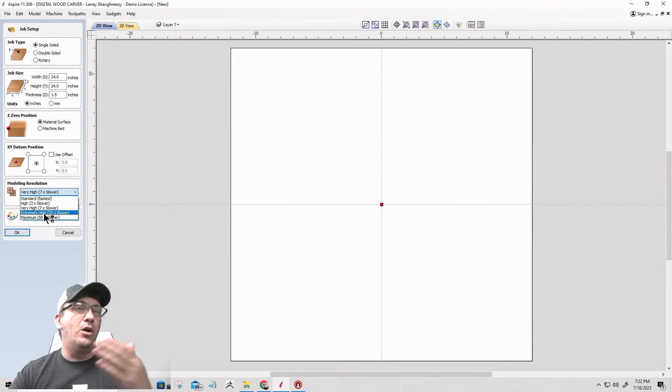So I'm going to hold down the Shift key before I click on create a new file. What that will do is activate the additional model resolution features here that aren't normally shown. And if I didn't do that at the beginning, I could always go back and do that after. What I mean is, let's say I had set up a standard resolution and wanted to go back and adjust it before I start modeling, not right in the middle of it, but I could come back to this icon here, which is the set job dimensions and origin. I could hold the Shift key down and open it up from here, and I would get those features as well.

All right, so we can access that. I like to do it right from the get-go to make sure that we get things going. All right, so for tonight's class, this model is going to be of size.

It doesn't matter where your XY origin, your datum position is and everything with this project, but this is what my particular setup here is for tonight.

And our model resolution, I'm going to set that to extremely high. I do not need to go to the maximum resolution here. What I do need is to be above the high resolution, at least extremely high. I don't necessarily need to be at maximum.

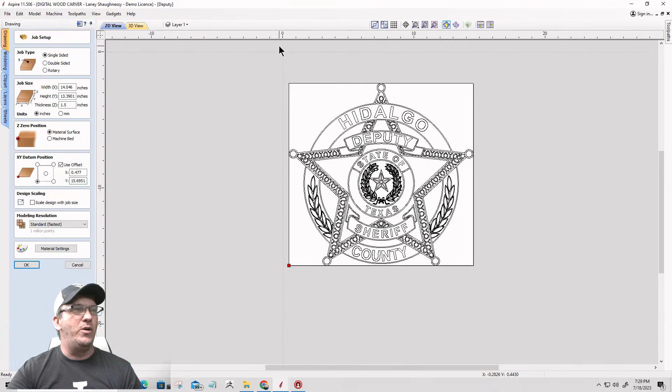It's going to either crash my machine or be way off the material and screw up this nice piece of wood, because my datum, my start point, is here, but I've zeroed out on the bottom of my board. So it's going to continue downward 15 inches from there, and over 0.477 inches because of that offset. I'm going to be like, whoa, what happened? Oh my God, what's going on?

I'll come back and try to figure it out, not paying attention to my job setup. I'm just going to sit there wondering what in the world is going on, why everything is so crazy. Then finally I'll figure it out, find that offset, uncheck it, and recalculate all the tool paths, and everything is fine. By that time I've either crashed my machine, screwed up a nice piece of wood, or I might have been smart and hit the E-stop before any of that happened.

So that's what we don't want to do. What we want to do is set up a job properly. In this case, I've got a job set up that's 24 inches by 24 inches by 1.5 inches thick. I'm starting at 0 for the XY datum in the center of my material, and touching off on the material surface. I hit OK to set that job setup, and then I'm going to import the vector of this design into my project.

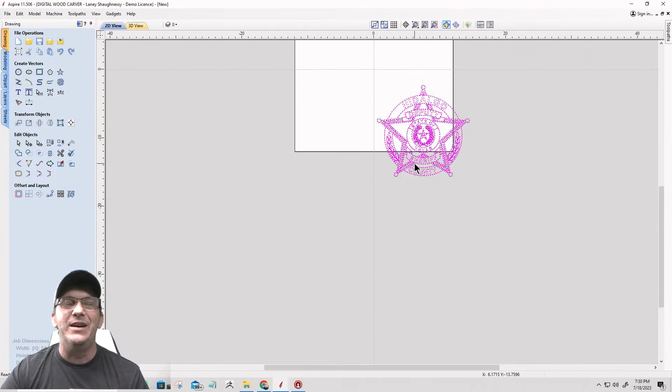So when I come in here and import that DXF file, it's going to import down here, right off the board. That's why it's never going to land perfectly in the middle - that's where the creator created that file. It's going to be up to me to align it to the center of my material and go from there.

That way we don't create these offsets and ungodly screw-ups. We don't bring those problems in. So keep that in mind.

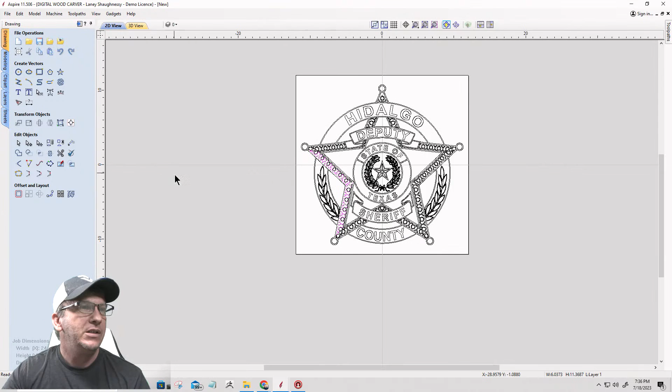So for the text, I'm going to get rid of it.

And let's put some text in there. Okay, I'm going to add some text. I'm just going to add the word county or something, so it's kind of a generic design and not specific as far as that goes.

And what I want to do here is go into node editing mode. I'm going to cut the vector down here on this corner of this arch, and I'm going to cut it over here as well.

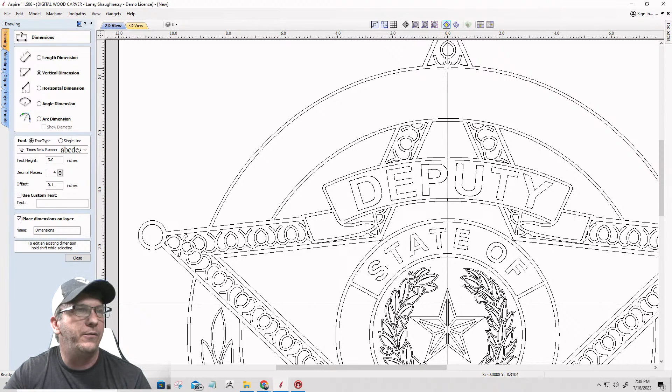And on that vector, I'm going to take a measurement - a vertical measurement straight up and down from the top arc to the bottom arc. And that measurement is 1.78 inches.

We'll call it 1.78. So I'm going to take my arch here and offset it - 1.78 divided by 2 equals - and I went the wrong direction, I'm going to go inward because of that.

And I'm creating a center line, a center arc. Now when I come in and add my text...

I'm just going to go with 'county.' The text that I'm going to use tonight is going to be Arial bold, just a straight up Arial bold. And I'm going to select that text.

Let's move it over here so everybody can see it. I'm going to move that there and this here. And I'm going to come over to the text on a curve tool.

And I want to be on the curve. I want to scale to fit the curve - not that big, right? We're going to reduce the scaling down quite a bit.

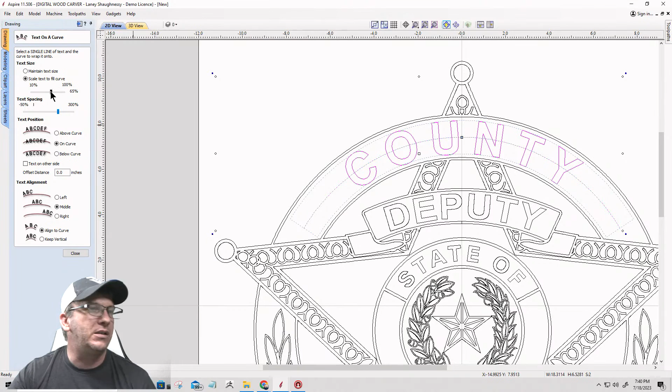All right, so that's going to be my county there. I could put any kind of text or anything there, but I'll just put the word county.

And then what I need to do is I just created an open vector by cutting it from the other vector there, so I want to go back into the join tool. Those two vectors that I have selected here on the screen, I want to join them back to one closed vector. Okay, so that little lesson was how to curve your text to follow a curve if you ever have to do that.

All right, now let's go in and look at what we have here. So on our star, if you remember, we have our circle and the stars sitting on top of it.

So number one, we need to create a foundation. We're going to be modeling, so we need our vector for our foundation, and that's going to create the base of what we're going to be building up upon, okay?

And then, give me just a second before I go to number 2. Kurt, how much of the design can be done with VCarve Pro?

All of the vector work and the V-carve setup, anything but modeling - everything I'm doing now can be done with V-carve Pro. But when it comes to building the three-dimensional model, we will not be able to do that with V-carve Pro.

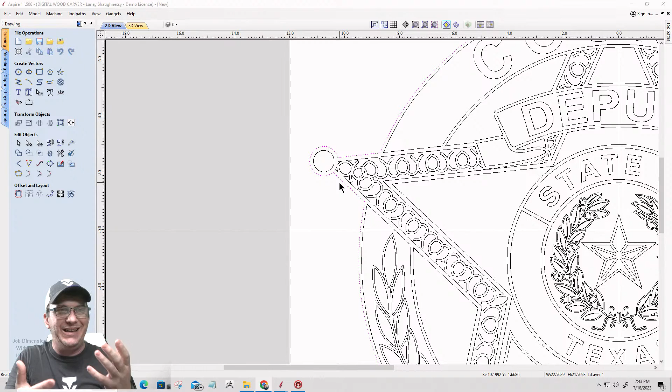Right out of the gate, you're not going to know if you have all of the vectors that you need. As you're stumbling along building all of the parts, you're going to come across situations like, oh, I have to build this shape up, but it's not building like I want it to, because either the vector is created incorrectly, or it needs to be redrawn, or it needs to be created because it doesn't exist. The vector that you need doesn't exist, and we have a couple of those.

So I'm going to show you all of that stuff as we go through and model and everything. Okay, let's get into that here.

First things first is this badge. In reality, the lower part of the star here is sitting on top of this outer ring, and then the upper part goes under that ring to here, right? So the ring covers the top of that, just like you see in the vector. We have to build the model so it fades and does the same thing. We got to build our shape for here, and we got to build our shape for here, but nothing is connected that we need.

These things, again, when you're just first starting modeling, you're not going to notice them. You're not going to be able to open the file and go, oh, that's what I'm missing. You're going to start creating the shape based on what you've learned, and you're going to be like, oh, I don't have that vector. What do I do? And you're going to have to go back and create it. I'm just giving you some advanced view of the things that we're going to need right up front to clean up the vectors, and then we're going to build our model after that.

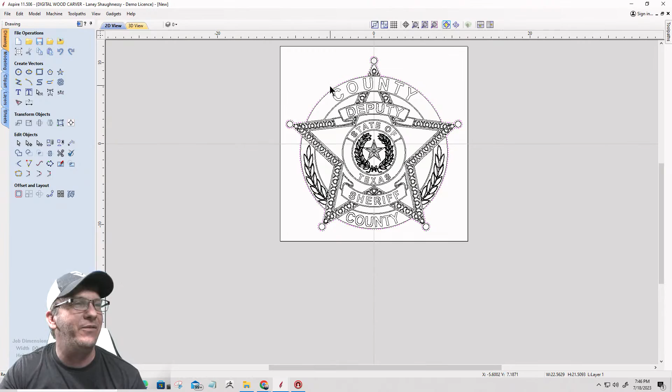So for the foundation, it's always 99.9% of the time, in my opinion, going to be the very most outside vector. The outside boundary is going to be our foundation vector. I'm going to split my view here so you can see it, and we're going to go into the modeling tab and create a shape.

Now I want this badge to have a slight curvature to it. I don't want it to be a big dome or anything, just a small curve, just a small bend to it. For me, 15% or 15 degrees of dome or curve is a good subtle curve.

So you're going to see when I'm creating the curves and things, I'm going to be working between 10 degrees and 15 degrees. In some cases, depending on their need or requirement, I might jump up to 22.5 degrees. But for the most part tonight we're going to stick with about 10 to 15 degrees, just a nice subtleness to it.

So let's create a curved profile, this one up here. The curved profile, we're going to go 15 degrees. And on a base height, I'll show you when the model gets built, but you have your profile height, your shape height is what it's called, and that's from where the model curve starts and where it ends. Then underneath that you're going to have straight meat, the thickness and everything - that's base meat. Anything under our curved profile is base meat. So for our base meat here, I'm going to go 1/4 inch.

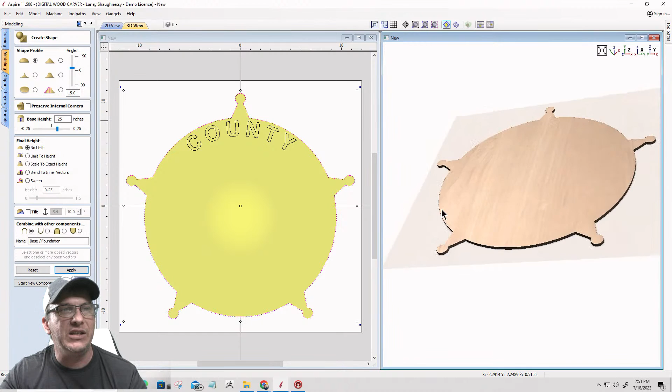All right, so if I turn this to the side and zoom in, this curved profile from the top edge of the material all the way over to the dome to the other side - that's our 15-degree shape height. And then all of the straight meat from the top here down, that is the base height. So the base, in this case, is 1/4 inch thick. And then on top of the base, the shape gets built - again, it's just a very subtle 15-degree curve. That's our foundation.

Okay, now let's close that out. I'm going to turn off the foundation here for a minute so we get back to a clean screen. I just made it invisible - it's still there, I'm just turning it off for right now for visual purposes. All right, we're going to maximize the screen back up to here, and we're going to continue on.

Now for this, the next step would be the actual star, the actual star here and everything that sits on top of this ring. So we're going to have a ring - these parts right here, so there's 4 quadrants: 1, 2, 3, 5 actually, 4, and 5. Those are going to get cut through, they're going to get cut out and cut through. They're hollow, you know, and everything.

And so the star sits on top of this ring, except for where it goes under the ring. What I don't have, if you look closely, is my star vector. I have a vector that's cut off right here and then comes around, but it doesn't actually connect to make the star. I don't have the star, so how am I expected to build that shape up if I don't have the vector for it?

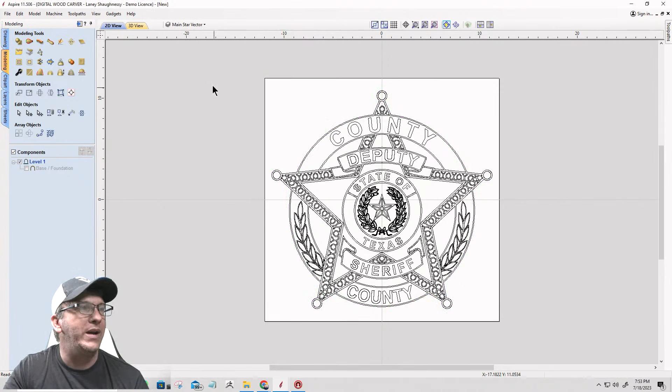We're going to take our entire design and copy it to that layer, putting a copy of it there. We're going to come back in, wait for it, get that white screen of death, so I'm going to type in save here in just a second. Let that catch up to itself.

Let me go up here and save this design because it's a big file with lots of vectors to deal with. So let's go to save as, and in tonight's class we'll call this our class 1 3D model, class 1 part 1, and hit save.

Now what you will see, once that saves, is our level layer 1, that's our default layer that always gets created when you start a new job, and we have a new layer we just created called main star vector. There's also a layer 0, which is the layer name of the vector file we actually imported. So the original star was imported into that layer 0.

So if I turn off our main star, the copy we just made, and turn off the original layer 0, that's the outline I put in there, and layer 1 is the rest of the design. So we're going to turn off layer 1 and layer 0, and turn on our main star vector, and I'm going to give it a different color, red, so hopefully y'all can see that.

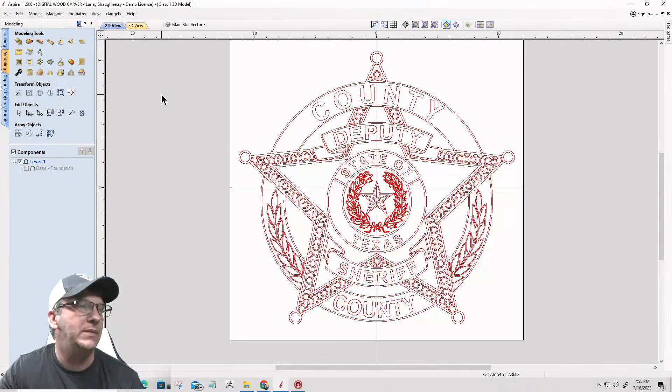So I want to make sure I can read the layer here, and make sure it's bold when I'm looking at it in this box. The letters are bold, that means it's active, okay? And what I'm going to do now is a little bit of node editing. We're going to go into here.

What I've got to do is connect from here to over here on my star. I don't necessarily need this line, it's a straight line, so I can skip the one in the middle that's selected right now. So I'm going to come over here, right on this corner, get to that corner, and cut the vector there, cut that line.

And over here on this outside corner, zoom in, get yourself zoomed in, get right on that last node, and cut the vector there. I'm going to follow this vector around, I don't care which way you go, one way or the other, it doesn't matter what direction, just know where you're going. I'm going to follow this vector around to here, to this side.

Zoom in, get yourself zoomed in, and cut that vector. Now that's also going to be a straight line that connects to here. Think of this being the inside corner of the star, the sides of it, like the thin waist of the star, if you will. So that's what we're connecting to.

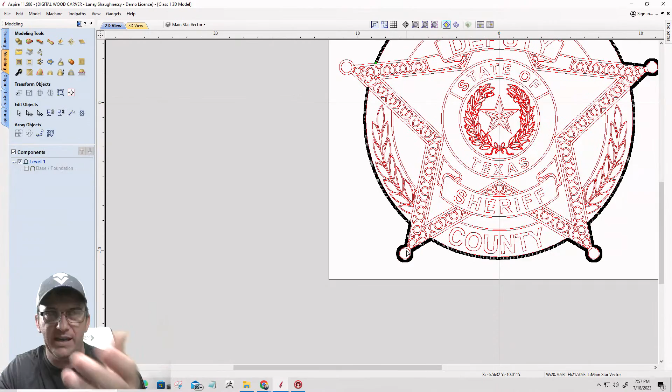We're going to do all the points the same way. If everything else was a distraction to you and you just want to focus on the star, you can go in and delete some of the other stuff. But I say just focus on what you're working on. After we do all our cuts, then we'll delete it out of there.

So the only thing we're left with is the star. But if you're getting lost with everything, we're not dealing with any of these little flourishes at the moment, we could get rid of them. We're not dealing with the word sheriff, the county, or the circles in the center, we could get rid of them. We could delete things if they're in our way. I'm not saying do it, but as long as you don't delete the vectors you're actually trying to connect and work with, you're fine.

Coming down here to our next point, get zoomed in. Make sure you are on that corner point, okay? Roll it in, zoom it in. I have a mouse with a roller wheel on it. Put your mouse wherever your point is, where you're rolling into that point, it's going to zoom in to wherever your mouse point is.

So I'm going to cut that vector there. I'm going to follow that, okay? So this line here is going to connect to this line right up here. So we're going to zoom into this corner, get in there, and cut that vector.

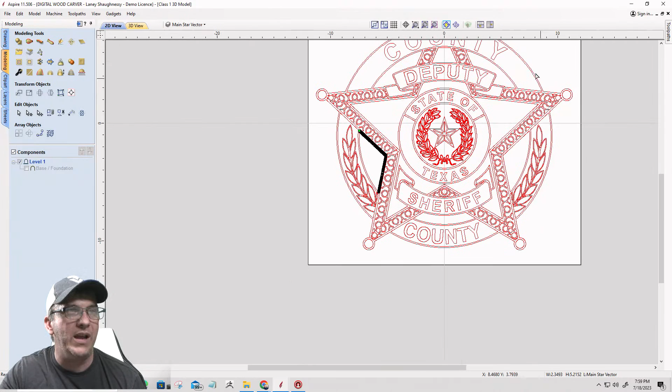Now once I get around to the points, I'll show you what we actually cut and we'll get rid of what we don't have. But let's go follow that vector around to this side, this point. And this is where we cut the vector, don't delete. This is where the time consuming stuff comes in.

Here, the star goes up, it connects to that line, and then it comes around and connects down here. So that's going to be the star. It's got this little curve to it. We're not going up past this banner. We do not go up past the banner. We're creating the outer profile here, so we're going around the banner. That's this curve right here.

So on here and all, I'll end up showing you as we get into it. We're going to come off just probably about the middle here. We're going to make a new curve, and it's going to be required for this, but you'll see. I don't want to get too ahead. I don't want to confuse you.

All right, let's go over here and cut the vector. Zoom, zoom, zoom, zoom. Get into that corner and cut the vector. Up here at this top corner, get into that corner. Cut it. Actually, undo that, Control Z. I don't need to cut that one. It's got to go over to here, and I've got to cut it on this side.

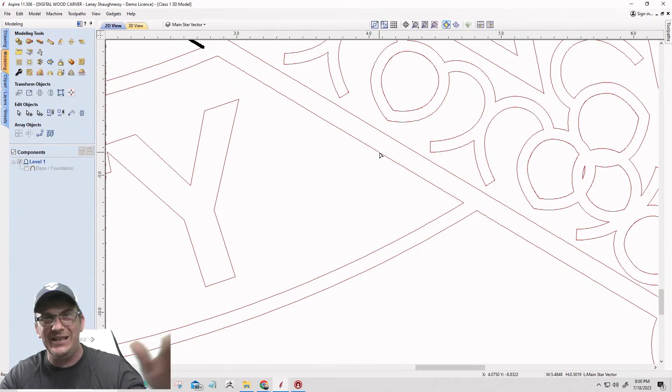Don't cut it up at the top. Don't need to cut it at the top. Control Z is undo, I undid that cut. Cut that vector there, and that leads into this point. Again, I'm not worried about this line, it's a straight line, so I can connect a straight line from point A to point B. I don't need these middle points. That's why I'm jumping past this line, and I'm cutting it on the corners of the points.

Cut the vector there, and so we're coming around now. We're coming around, let's come in here. Get zoomed in. Cut that vector. Now this one comes up and connects up here, right on that green one. Cut that vector.

And around to this point, get in on those corners. You're going to hear me say that over and over again until we get through all 5 points. And then this is going to connect over to here. Get in there, cut that vector. All right, so we have got one more point to go. We're getting there, we're getting there.

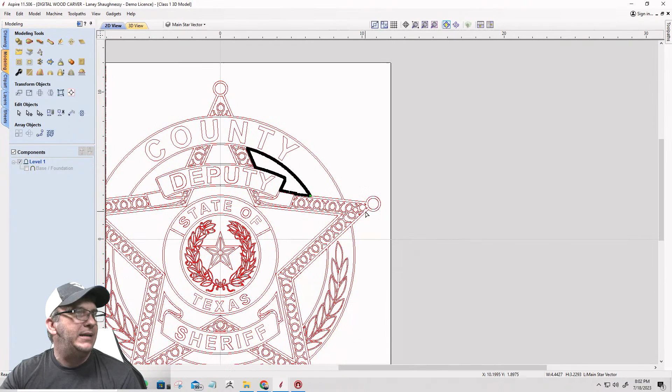Come around to this one. We're almost there. Cut the vector. That's going to connect over to here. Cut the vector. And that is going to come up and around, come up and around to here. Zoom in and cut the vector.

All right, now this one is kind of all by itself. It doesn't connect to anything except for kind of itself, right? So we're going to still cut that free. Zoom in, right click and cut the vector. Stick with me, we're almost there. Come over to this side, get in that corner and cut the vector.

All right, now we're going to delete. Let's go through and get rid of things. So this line right here, it's not the star, gone. This inner vector right here, it's not the star, gone. The word county, gone. This vector here, gone. All of our outer stuff, we can work our way out, and then the inner stuff here, you can cut and get rid of. Gone.

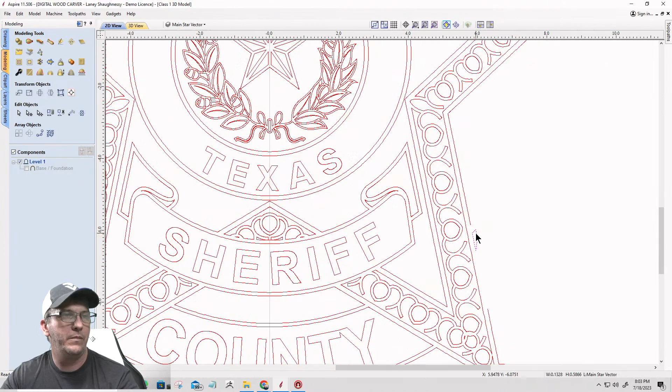Leaving our inside lines for our inside hips, right? You know what I mean? And they connect to the corners and stuff. Down here, outside line, we just cut it loose, gone. This ribbon here, get rid of that. The word county there. Over here, outside vector gone. Get rid of these leaves.

And remember now, this is not your original, this is a copy. Do not do this to your original, because then you have nothing to work with for the rest of the model, right?

All right, so now this vector right here is cut free, right? And over here, this one on this corner needs to be cut. Zoom, zoom, zoom, zoom, zoom. Get in there as tight as you can. Cut that vector, and that arch goes away.

Delete that. All right, now let's get rid of everything that's not our lines. So in the middle here, I'm going to select all this middle stuff and hit delete. Be cautious of what you're deleting, make sure it's not your outside lines. Now the outside lines are our stars. I'm going to keep this for a minute, you'll see how I'm going to use that in a second. But we're going to get rid of all of this miscellaneous junk.

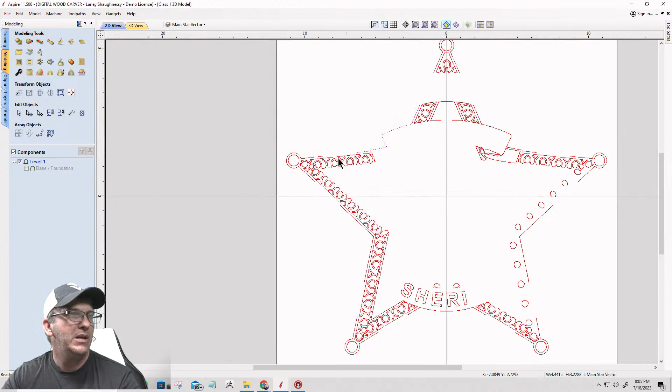Go through and delete this stuff, all these little bubbles and things. And the only thing that I don't want to delete again are my lines, right? So anything inside of those lines, I can get rid of. Delete. Delete.

So now I can go through and start being selective. Make sure I turn off what I don't want to delete so I can be a little bit faster about it. Hold that shift key, turn off what I don't want to delete, and everything. And as long as what I'm trying to select is not 100% in my selection window when I draw it from left to right, then it's not going to select it.

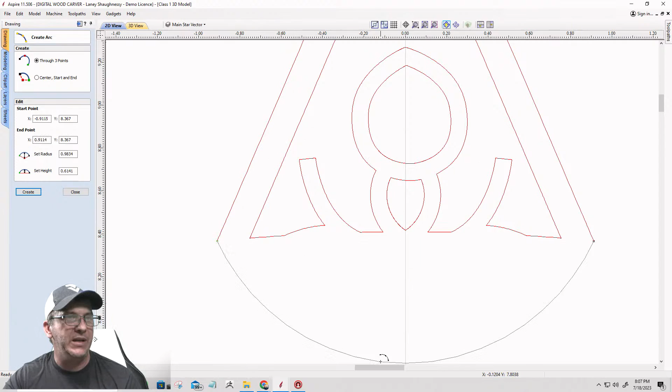Okay, now the reason why I'm keeping these things up here is because this part has to be closed off. The vector has to be closed off, but there's a slight arch here. So we're going to use the arc tool, draw arc tool. We're going to click here. Let me zoom in, let me get really up close and personal with that so you all can see it. We're going to click here for the left side of our arc, we're going to click here for the right side of our arc, and our pull up here we're going to follow that curve, right? Once we do that, we're going to take and join that together as one closed shape.

And then the stuff in the middle, I do not need. Okay, so that's that point there. Over here, this left side and this right side has to connect together, because remember now, this is hidden by, it goes under that ring, right? So we have to close off the vectors accordingly. We have the top part, this is all hidden by that ring, and we have this bottom part here.

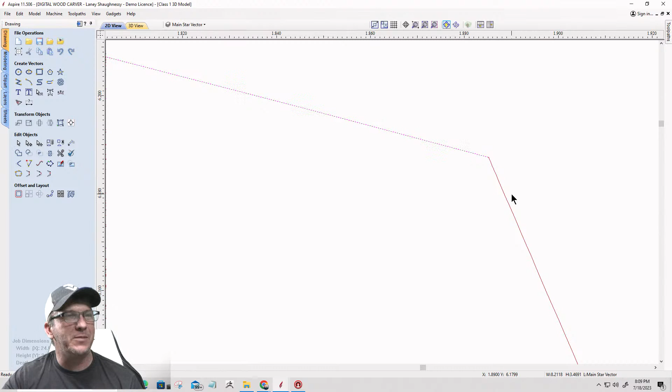So right here, I missed my point. So I'm going to go into node editing, and I'm going to bring it up to the end there. I missed it. That's why it was 2 instead of 3. I missed it again, Lord have mercy. Let me do that again. Node editing, drag that node. Get it, zoom right in there. Perfect. All right, I missed my end, that's why it did not connect together. So let's go and join those 2 as 1. They should be 1. And then I can get rid of

Let's hit delete on that.

All right, so now I'm left with this basically a rough outline of a skeleton of a star. What I need to do now is start connecting the dots, point A to point B. Now we can't just select everything and go connect.

We have to select one vector, select a second, and join it. Go to the next one and join it. Go to the next one and join it. You got to work your way around.

So I'm going to just go right to left, doesn't matter. I'm going to select this vector first, hold the shift key down, select this vector, and join with a straight line for that connection. Now I'll hold the shift key down and click on this vector and join with a straight line for that connection. Come down, hold down that shift key, select this vector, and join with a straight line. Come around, hold down that shift key, select this vector, and join with a straight line.

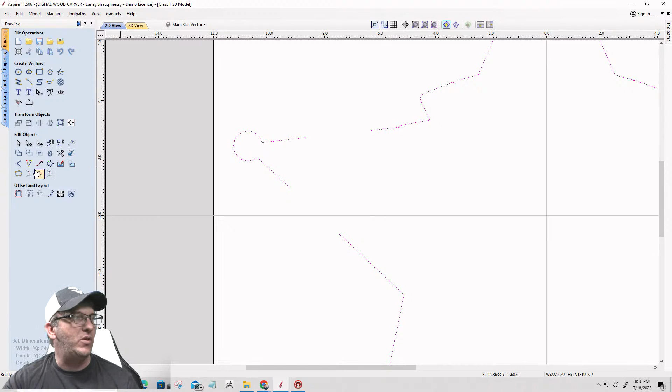And work your way around, join with a straight line, join with a straight line. And on this one, when I have this selected, it finishes, starts and finishes, so I can just click join with a straight line twice. Once, twice. Now I have the vectors that I need to build the star.

Okay, I have the vectors I need to build the star. So that is my star vectors, and now we have that. If I came in and turned on level 1, you would see that we have the red line on top of the black here, but you can see we now have a vector to build upon. Okay, cool beans, all right, so that takes care of that.

Now let's take a pause for a second and hit save to save our work up to this point. And let that save. And while that saves, let me answer a couple of questions here.

Michael Meslick says, greetings Laney and everyone, all good info, no really easy way around this, stay focused and be successful. That's exactly right, take your time, one thing at a time, and don't get too overwhelmed, just attack it however is best for you. Keith Kessler says, hey Michael, how you going? And Michael's okay, and I'm late. Keith, what are you doing being late, man? How you doing, Keith Kessler? It's good to see you. All right, cool beans.

So the next step is we can start looking at things that are insignificant in our build and stuff. And so sometimes, not everything, not all the time, but sometimes little things that don't belong, that's trash, that's oversight or something, they're going to be insignificant in this full overall model build.

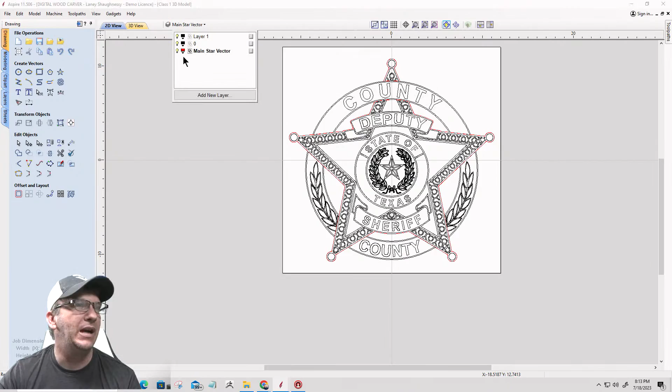That was a mirror image, one to the other, so the trash is over here as well, right? And so as far as cleanup of miscellaneous trash and stuff, really that's all there is to it as far as the trash is concerned.

All right, now each of our vectors here, so the ring vectors, right? So we have this ring vector, which is the top one that I have selected here. And it's hard to see, but it's in pink and it's selected there. We have this one here.

Now this one, this ring, or this vector, actually is kind of part of the leaf too, right? It's drawn itself into this leaf. And so you'll see when we start building the shapes how that affects it and everything. But nothing to clean up there, it is what it is.

That's good. Over here, it should be the same way. If I select this vector, that outer boundary of the leaf is there, and that's good. This inner boundary here is fine, that's going to be one of those cutouts.

Now, this could technically be a cutout, or it could be what I did with the customer. What he wanted to do is we lowered that down when we were building the model. It wasn't as high as the rest of the model, and it was a place for him to V-carve badge numbers and stuff like that, and that's an option. All right, so right now everything appears to be clean. The only thing that is not clean is this vector.

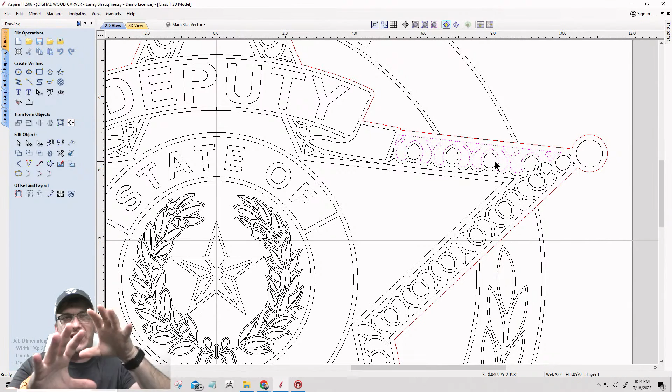If I have to build this shape up of these little things, think about the model being built in here. These little things are raised up. There's a little decorative flourish, and the model, the component, the meat of the wood is this little swirly part, the part here where my mouse is.

The way the vector is created, if I were to build a shape right now, just a flat shape, an eighth inch tall for example purposes, you're going to see that it doesn't fill in the part that's supposed to be raised. It fills around it. So when we look at the 3D, it's not actually the shape that's raised up.

So that's a no-no. We've got to clean up and reconnect those vectors properly. So that's going to be what we do next. Just like we did before, let me delete that component, keep things clean. The next phase is we are going to clean up those vectors, make a copy of everything, keep what we want, delete and get rid of what we don't.

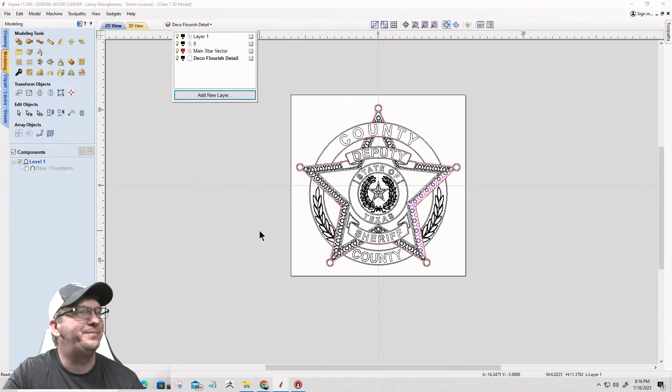So a new layer - I'm gonna call this the decorative flourish detail, I'll call it like a flourish. I don't know if it's really technically a flourish, but I'm gonna call it the deco flourish detail layer. I want to take everything - let's turn off the main star vector for now, keep it hidden so it's not in the way. We just want to have this, and we're going to copy this over to that Deco Flourish layer.

Let it do that. All right, I'm going to be a little southern here and drink some sweet tea out of a mason jar. Hold on a second. Oh my goodness, good stuff.

So now we're going to turn off layer 1, layer 0, and the main star layer. We're going to make sure that the Deco Flourish layer is the one that's active - it's bold, and when I'm clicked off of the layer window, I can read the word up here, Deco Flourish layer. That's the layer we're in right now.

So on that layer, we're going to get rid of what we don't want, keep what we do. I'm going to do that right out of the gate so I'm not dealing with a whole bunch of stuff. What I don't want is I don't need the outside boundary, I'm going to get rid of it. I do not need any of this thing that is not part of that flourish.

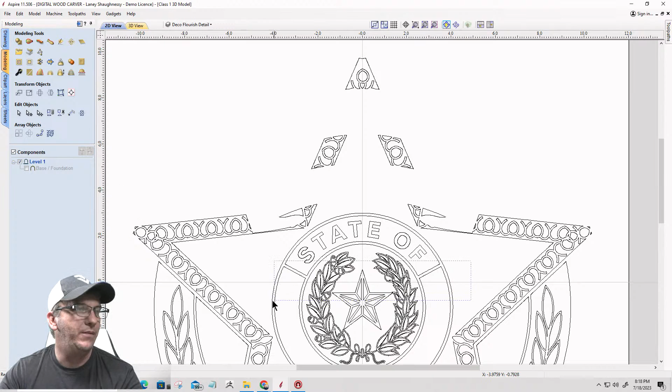So the deal here is any shape that is not that Deco Flourish, I am not keeping. All right, so this circle can go away, that circle can go away, and all of this inner stuff here.

Again, keeping what we want, getting rid of what we don't. All right, get rid of all of this. Over on this side, same thing, get rid of all of that, and getting rid of this.

Okay, so this is the flourish. Now, this flourish - the connections, these parts that need to be connected and closed off, are not. It's opposite of that. So we're going to cut the vector where we need to cut it, and we're going to connect vectors together to close them off. We're going to create, when it's all said and done, multiple closed vectors, but they're going to be the little flourish only.

When I click on it, if I build a shape on it, it's going to be built on the inside of that. Some things are missing that we're going to need, and all of that, and you'll see how we do that in just a minute.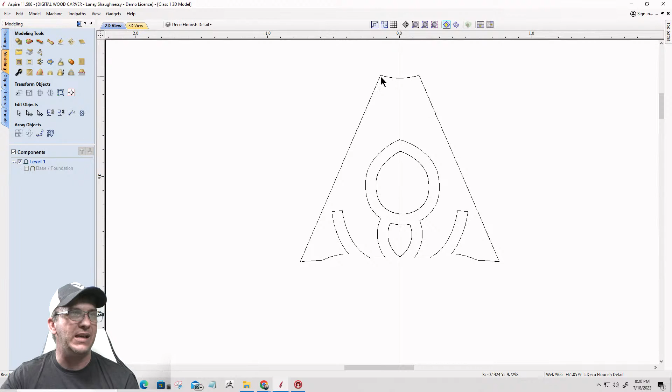So what we need to do is start somewhere. I'm going to start at the top, and then we're going to work our way down, left to right, right to left - I don't care, just one section at a time, work your way around. So up here, these lines are not part of this flourish, this flourish gets cut off. We have these particular shapes, and what we're going to do is go into node editing mode.

We're going to cut the vector on this corner here, and over here. We're going to hit delete to get rid of that upper part, right? Now, this shape here and everything needs to get closed off in a manner that fits kind of the rest of the theme, the way these shapes are designed.

So what we're basically looking at, this segment right here, is essentially this segment right there. You can see that it has this loop that comes up, connects, there's a small loop, and then it comes up and connects, and then it closes around. So it's essentially that loop, like one of those little segments. That's what that is.

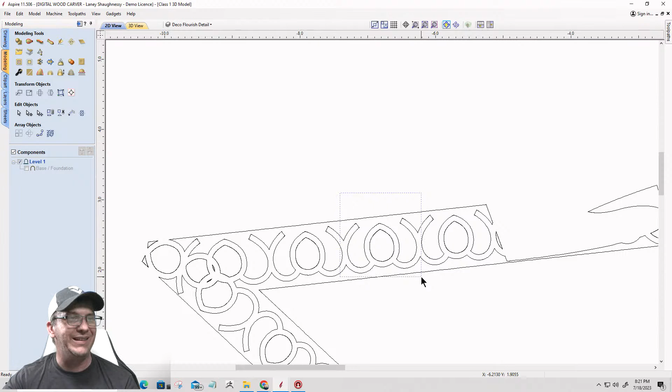Okay, so we have this, that comes up and kind of connects, if you will. It's not 100% exactly that, because there's a little shape in there that doesn't have that, but still try to follow the theme to the best of your ability.

So what I'm going to do is use the arc tool, and I'm going to come in here and snap there, and I want to be on the end of that. I'll hit escape because I missed that altogether. Make sure your smart snapping and geometry snapping is on, but I'm going to connect there - I'll move that in just a minute. I missed that mark again. And I'm going to come over here and connect to this one.

And then I'm going to figure out what my curve is going to be. That is what my thinking tells me to create and finish off this shape. But it's actually not correct. And I'm taking you through this - this is the mental process. If you were looking at this, I'm taking you through my mindset and how, when I'm looking at something, I discover, oh, that's actually not right.

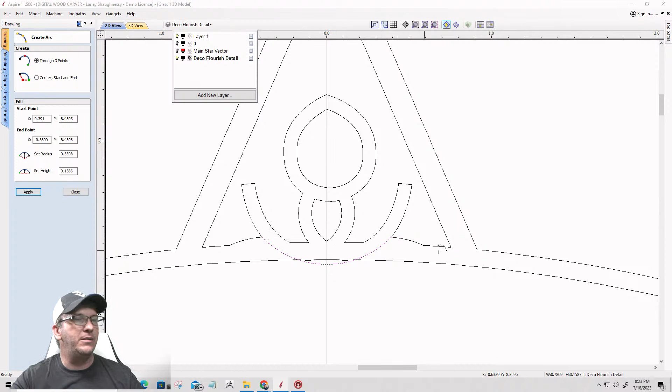What we have to consider with this top part is that this part is under this ring. Okay? There is a ring - remember that virtual part that comes right here as an arc, on that one piece on the star. Let's turn that off and turn that on. That arc right there, right? So connecting this as an arc here, it's a no-no. We can't build that shape up because it's behind that ring, if you will.

So what we actually need to do is just connect these ends here a little differently. Let me turn that layer off. And instead of this, we actually need to come in, cut this vector on the corner here, get rid of that, it doesn't belong, come over here, cut that on the corner, get rid of that, doesn't belong.

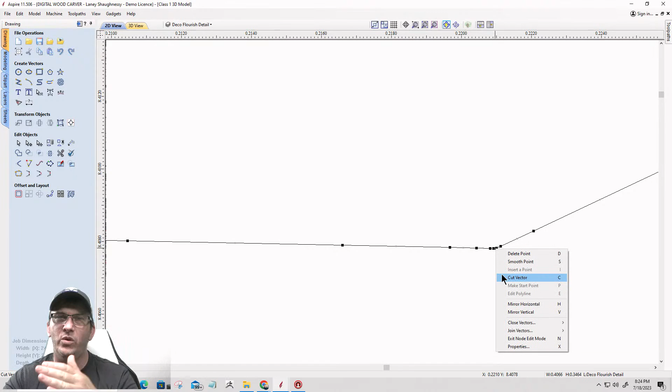Here, this line goes away. This line right here doesn't belong. And we've got a lot of nodes to deal with, so we got to cut it on the corners instead of just right-clicking and deleting span - we've got a lot of different nodes in there. So we've got to deal with it and find your end points, the end of this line before it transitions into this line.

And this goes away. This part connects, joins with a straight line. That closes that off. Over here, come over here, cut this, find the other end of the line. It's only one node to deal with, good. Cut that there, get rid of this span in the middle, delete, and this vector joins with a straight line, closes it off.

Now here, this remaining vector joins with a straight line, closing it off. Because that's going to be where our arc and everything's going to be in there, and you'll see when we actually build the part. Now if we select this and look, we have 5 closed vectors - 1, 2, 3, 4, and 5. So that is done. It is closed off.

Let's go to something that might be a little bit easier to visualize. On this one, this straight line goes away. So let's go into node editing mode. Again, we can't just right click and delete span - we've got all these bunches of nodes to deal with.

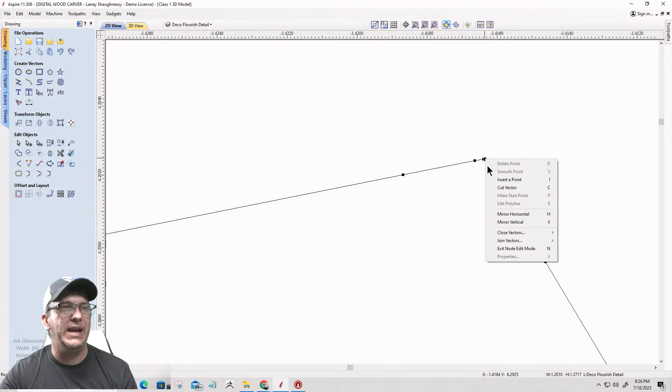So we need to find your corner points and everything. We're going to come over here and cut the vector, over here, get in on that corner and cut the vector. Over here on the other side, cut the vector. And one more time, cut the vector. Now that line travels all the way down over to here.

Find that corner - there's a bunch of nodes bundled up, but find the corner to the best of your ability. It's the one that's going to be the last one on that edge. Travel over to here.

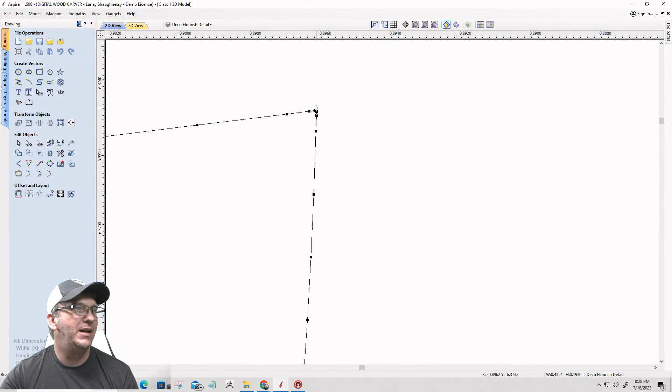Cut the vector. Now on this one, these outside boundaries, delete, and then we need to connect these ends together. So I've already cut this vector here, but it doesn't look like one side of it did not cut. So it cut there. Let me make sure it did cut there. Over here, I know I cut this one. Cut the vector. Okay, now it's cut. All right, we're going to get rid of that.

So here, there's a part of the badge, the star, that comes right through here that cuts this off. So we will select this and this, and I can join with a smooth curve, or I can join with a straight line. It kind of depends on what is coming into here, right? So it's going to be more of a straight line from here to here instead of a curve, because that curve comes right into where it does not belong. You understand what I mean?

So Control Z to undo that. And this is going to be select here to here, and it's going to be joined with a straight line. Up here, these two are going to be joined with a straight line, once and twice. So now that is 3 closed vectors.

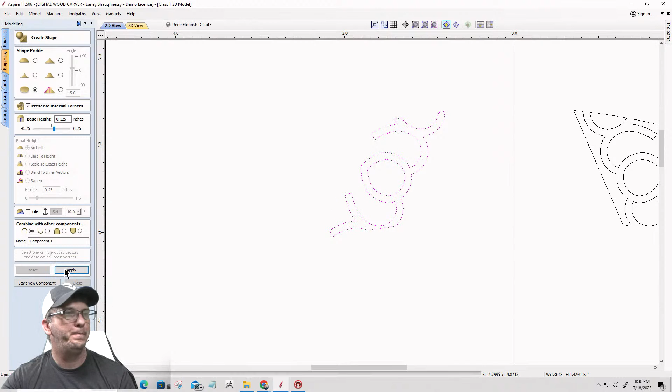So just so you know, now when I go to build the 3D model shape, when I go to build the shape, it's going to build in that, and if we look at it in the 3D view, we're going to have that little decorative flourish. Now we're going to build it with a little bit of detail and give it some angle to the edge. You'll see how we do that. But that's what we want. We want that little vector to be raised.

Okay, so undo that. Let's close this and delete that component. That's trash, that was just an example. And that's our end game, that's our end game. The whole purpose of this is to create those closed vectors and everything.

Now, pretty much this is a mirror of this here, and my project is centered. I could take this object right here and I could mirror it. Let me zoom in nice and tight on this so you can see this. I could take this object here and I could mirror it, flipping it about job center, creating a mirrored copy, flipping horizontally. So it comes over here and you can see that it landed right in spot there. So I don't have to do a whole lot of trimming and cutting and all that stuff. I could actually just remove this, take this, and mirror it over there, right? Why draw what you can copy, right? That kind of thing. It's not always going to be that easy and all, but that's what it is.

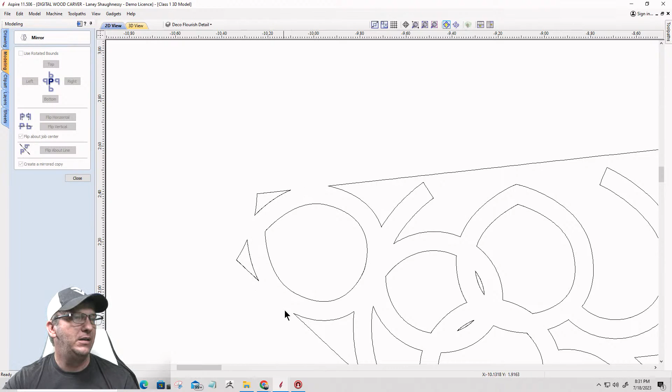Okay, now this one, a little bit different. This one is going to be connecting to here, to here, to here, to close off this circle. So we're going to go into node editing, and I said a little bit different, but no, that's exactly what we're doing here. We're going to come in here, get into those corners. Again, zoom in, get it in there, and cut that vector on that corner. And on this corner, we're getting rid of the little pyramid, if you will. When I say the pyramid, this top part here is not part of it. We're just keeping that line.

Over here, cut the vector. All of this can be done in Desktop and Pro, all of this vector work and stuff. Cut the vector. And again, get rid of that. Over here and here, same thing, we got to cut the corners. So get into those corners. Get in there, get in there, get in there. Zoom, zoom, zoom as much as you can. And right click and cut the vector.

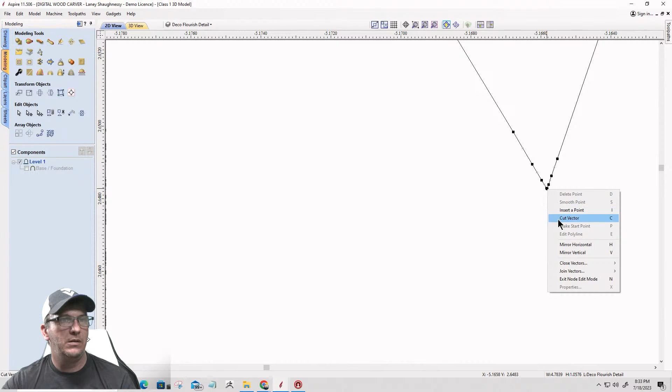And at the other end of this line, the other end, it comes down and around. I'm coming all the way to here. Zoom, zoom, zoom, zoom. Cut that vector, and that straight line goes away. Okay, over here.

I think I've already cut this vector. No, I did not. All right, zoom in, get in there as tight as you can. Cut that vector.

And then all the way to the other end. Got to follow it all the way around, all the way down, all the way to here.

Zoom in, cut the vector. Now that long line gets deleted.

Now before I go moving on down here, I'm going to finish what I started up here. Okay, now let's start at the end here. I'll just show you what we're connecting now.

So this and this have to connect with a nice smooth curve. So we are going to join with a smooth curve.

Okay, a little bit of a hump there. We can fix that. But let's go over here, go there to there, join with a smooth curve.

Funky little hump there. No problem. We'll fix that one too. And join with a smooth curve.

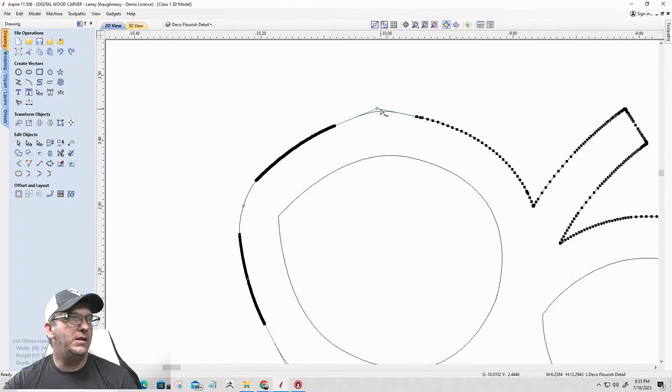This one here, with an arc. Bring it down just a little bit.

And over here, when we join with a smooth curve, it creates a Bezier curve.

I'm changing it from a Bezier curve to an arc. And I'm bringing the arc down.

Just to its natural curve, and closing that end off.

Okay, so that end's closed off. Now working my way over to here. This is going to connect to here with a straight line. So go in and cut that vector.

On this side too. This is the most tedious part of this design, the most tedious part of the work. And once it's done, then it's all kind of fun in building the model and everything.

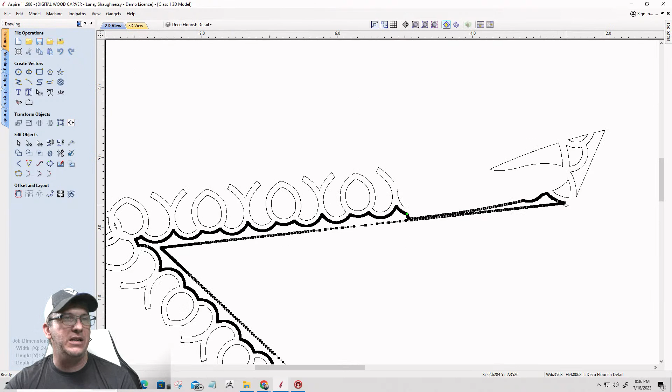This is the last vector edit that we have to do. All right, so now this shape comes up into here and then around and down to down here and everything.

But let's go over here first, because this is kind of part of that shape we got to finish off here. So we got to come over and get into that corner, cut that vector there, up to here.

Cut it there, and then this is actually not going to get used.

That's going to get removed, and this all the way down to here. Let me see here. All the way down to here, should I say.

Cut that vector. So that straight line, not the curved line I'm on, but this straight line right here. That straight line right there, delete that. Okay, all right, let's close this up.

So this to this, straight line. Straight line. Oops, hold on. That to here, join with a straight line. Close that off. So that closes that off.

We'll come back to these two in just a minute. Let's work our way around here for a second. This, node editing, cut it on the corner again.

We're getting rid of all the straight lines. We're keeping the curves that go around and all, but these straight inside vectors.

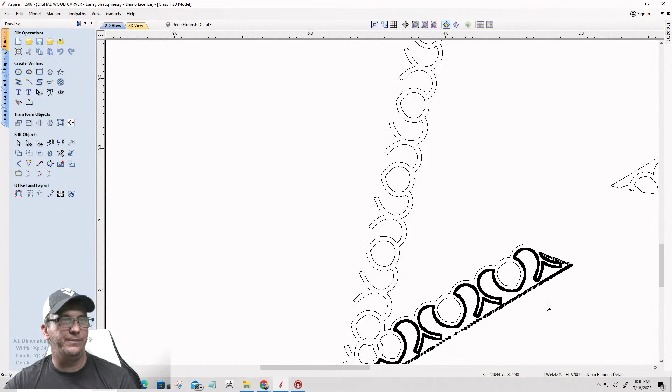All right, so this one up here on this corner, cut the vector there.

And then that travels all the way around over to here, and we cut it over here.

All right, so now I should be able to hit delete and get rid of that. The only thing I'm left with is the flourish, right? That's what the goal is.

Now, once again, when I get here, side A and side B should be pretty much a mirror of one another, right? So once I get one side done, rather than having to go through and do the other side, I should be able to just mirror it over.

We'll test that theory in just a second. Let me finish closing off the vector, and we'll see how we go.

All right, so to close off this vector, we're going to take this vector here and this vector here, and we're going to join with a smooth curve, and it's going to close that off there.

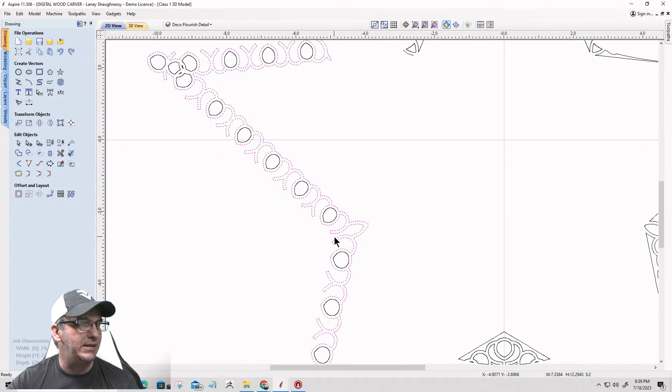Okay, don't need to do anything with that one. That one actually curved properly. So that tracks coming over to here.

We've got this one here and here. Join that with a smooth curve. Nice, that comes around, and this one.

Also join with a smooth curve. Whoa, that curve's a funky curve. So we'll go in and into node editing.

We'll take this curve that was created and turn it into an arc. And then I'll pull that arc down.

To its natural curve. Okay, so now that, if I select this side here, and I look at my join tool, I should have closed vectors. So I do have 26 closed vectors selected, so that one's closed. Now I'm going to group that together.

I'm going to hit G to group that together, and if I mirror that over, fingers crossed it's going to be exactly the same, so it's going to be a time saver for me. So let's mirror that: flip horizontally, create a mirror copy, flip about job center, flip horizontally, and boom. It landed exactly where it needs to, right?

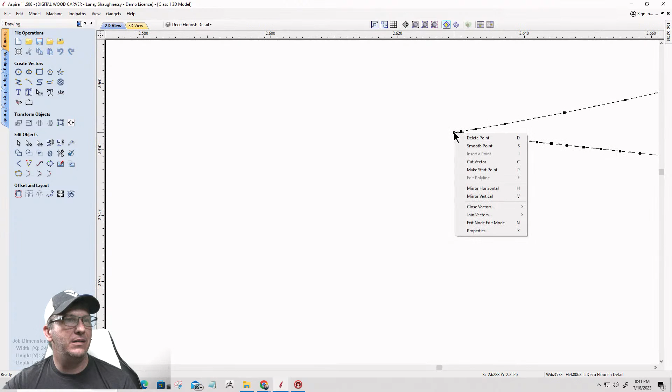Yay for me. So what that means is I can Control Z to undo that. I can come over here to my node editing, and I can cut this vector here, and there, and I can delete all of this.

Mouse is giving me a little bit of a headache. All right, and I can mirror that over. Right? So now I'm happy with that. Saved my time and everything.

Now all I have to deal with is this bottom one and then these two parts right here. These two are going to require just a little bit of extra drawing, so that's why I'm leaving them for last. And before we do that, I'm going to save all that work, right, and I'm going to come over and answer a couple more questions.

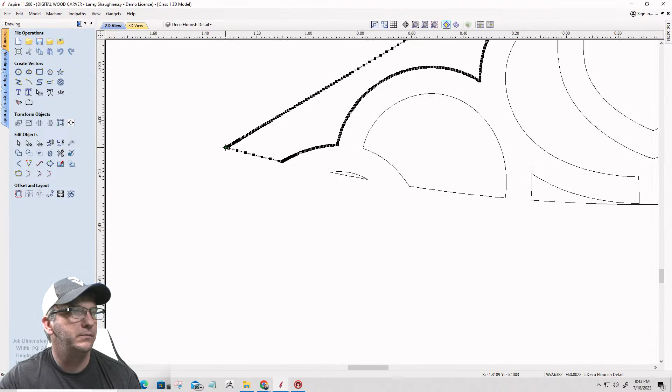Now on this one, we are going to again get rid of the straight lines. We're only keeping the flourish part, right? So we're going to go into node editing, and we're going to cut the vector here, actually all the way to this corner. Cut the vector, and let's go back to this corner too. It's actually this corner that gets cut. All right, and so we're going to get rid of that straight line so that we're left with this. Now it's a straight connection, a straight line connection from here to here and everything.

And essentially what we can do is, the way that this curve is and all, we could go in and connect using an arc from here to here and just follow this natural curve. In order to do that, I need to still cut things loose.

So we're going to come over here, and on our corners, same thing, nothing changes. We're going to cut the vector on both sides. Cut the vector over here. That stays. That connects with that. So here on this corner, we cut the vector, and here. So that's going to connect with that. That's going to connect with that. This is going to connect with this.

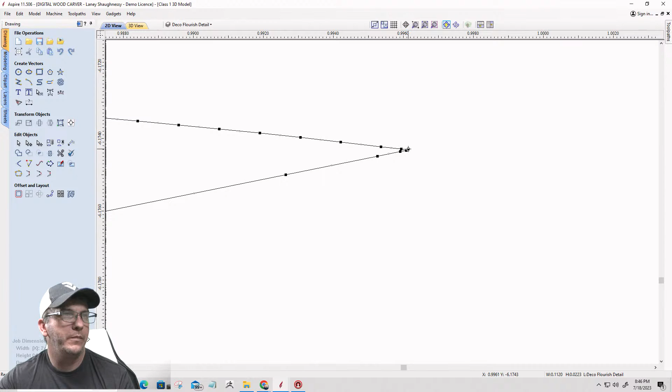All right, cut the vector all the way over to this corner, following around to here. Get in there, zoom in, get right in there on that corner now. Very important that we do our best to get on that corner, all the way to our last one here. Okay, now what we have is a series of loose vectors. So this is cut free from this, which is cut free from that, that, and that. Keep that in mind, okay?

What we're going to do now is we're going to come in with an arc tool, and we could do this one thing at a time, join with a straight line, join with a straight line, that kind of thing, but I actually want to have that curve to it, that's why I'm doing it this way. I'm going to take my arc tool and snap to the end here, snap to the end here, and pull this down and snap to the center of that line there. So I have this arc that follows that, right?

I'm going to come in and delete my single vectors that need to get cut free and everything. So I'm going to come in and select all of these.

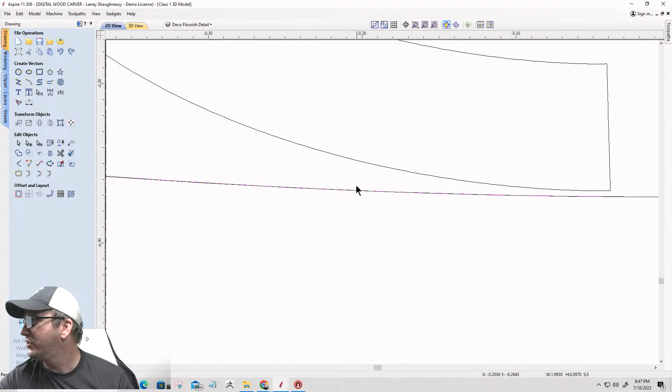If I turn this one off, you'll see these pink highlights still. It's hard to see on the screen, but my little line segments are all selected. I can now hit the delete key. That gets rid of them, so all I have is just this one thing here.

And I can take my scissors and trim that. That connects that. Trim that. That connects that. Trim there. That connects there and there, all the way over to here. That closes that off and connects that. Cool beans. That leaves me with these here.

Now these, we're not going to try to redraw a shape and all that. They actually get connected with a straight line, so they're easier than what they look. There's a lot of weird stuff looking here, and we got to try to decipher what is actually one of these shapes in here.

What we're going to do is this line is going to connect here to close off. This is going to be open, and this line is actually going to connect over to here to create the little curve. This line will end up connecting over to here, and you'll see here. Well, let's do it. Let's go to node editing mode, and we're going to cut the vector.

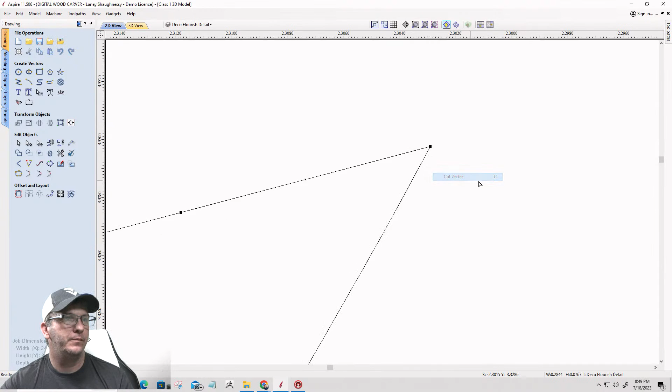Cut the vector. Come around. Cut the vector. Zoom in, get on that corner. Okay. Get on that corner. Okay, now this part right here is not going to be part of the flourish and all.

It goes away. This part, not part of the flourish and everything, it goes away. That leaves only this. This part here will go away, and that leaves this. So straight line there, straight line there. So I can join this and this with a straight line. I can join that and this with a straight line. It did it down there, but that's okay, we'll clean that up in just a second. Let's join that. Okay, so that'll be that.

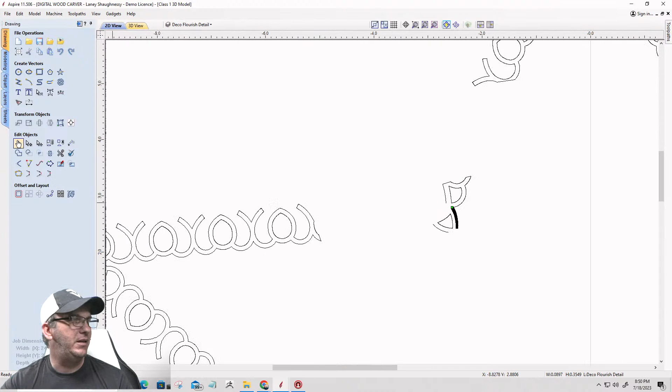And then this, let's go to node editing mode. This straight line, we're going to delete that span because it actually doesn't go there. This is going to... this one, let's get out of the node editing for a minute. This to this is going to be joined with a smooth curve to create that curve.

And this, let's go into node editing. Cut the vector here and here. This and this will join with a straight line. Keeps wanting to connect here. Let me join these two together first.

Okay, one more time. That and that will join with a straight line. There to there. And that's what that shape is going to look like. Now, once again, I should be able to mirror that, flip horizontally, and it should land right there, right? So great, good, wonderful, all that jazz. I can delete this, and I can mirror that.

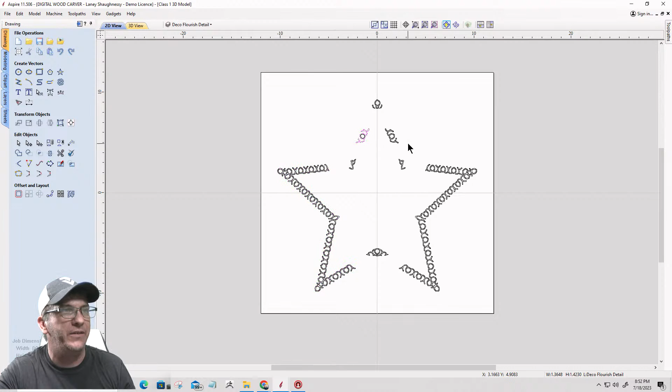Wonderful, so this is my deco flourish detail. Holy guacamole, ladies and gentlemen, right? That is the most tedious part of this design, of this particular badge. That is the most tedious part, is getting that flourish to where all of these vectors are all closed off, so that when I come in here and I build a shape off of this, we'll go with a little 10-degree curve.

But when I build that, let me ungroup that and ungroup that. Let me verify that all the vectors are closed. Select all open vectors. All right, we still have an open vector that did not close properly. So let's fix that. That's why the model did not want to create, because it was telling me there was a problem. So we're going to go to node editing.

What I'm looking for is typically the opening and the closing generally happen around the green node, where one line meets, the beginning and the end meet, right? So if I look at this, there are... we got others, bear with me.

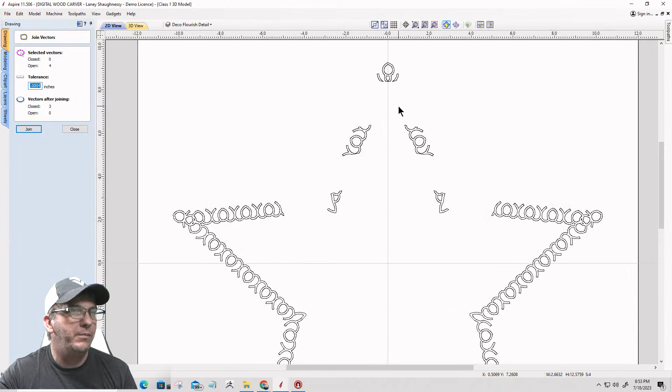If I select this, this is one vector here, it's not connected to this vector. So we have two vectors selected. We need to close them, so we click the join tool, and it will now connect them together. So just because we did a join with a straight line, it didn't quite close it, it left a little bit of a gap or something. So now when I right click and select all open vectors, there's still one more open vector, and trying to locate it right now, I don't see any pink on the screen. But here's a key thing: I just right-clicked on the screen and said select all open vectors. I selected the open vectors.

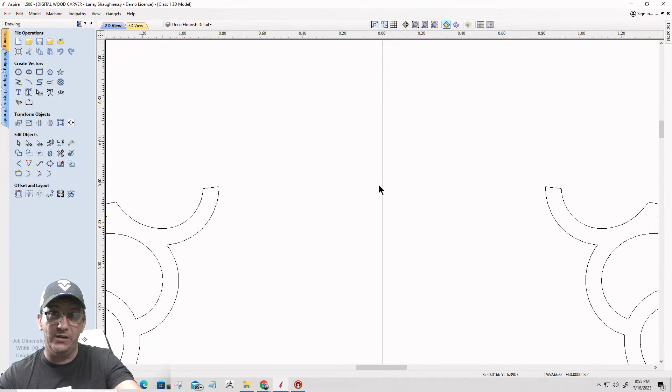So now I should be able to come up to my magnifying glass that zooms in to the selected item. It's the magnifying glass with the pink dotted line around it. When I click on that, it will zoom in, and there is nothing there, but it's showing that there is a vector somewhere. Because it zoomed into such a small, insignificant vector, I'm just going to simply hit delete. It's not important to me. If I can't see it when I zoom into it, because it zooms right into it, that object is front and center. If I cannot see it here - and that's not it, that's my 0,0 line - if I can't see that vector visually, then it's insignificant. So I'm going to right click and hit delete.

And I should be able to go select all open vectors, and there be no open vectors in the design.

Okay, so now if I were to create a shape on this, which we're not quite ready for yet, but if we were to build the shape on this: 10 degrees, 1/8 of an inch, apply. It's going to build that shape on that little flourish and everything.

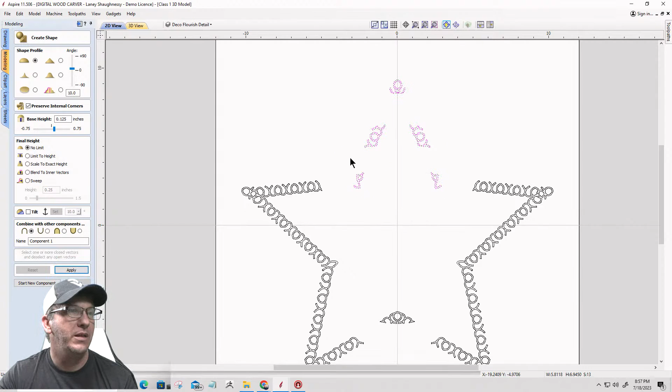So what I'm going to do is let's piecemeal this a little bit. I'm going to select this upper section here, and let's see if it builds that component. Okay, all right.

Maybe, let me see, let me turn something off here. Let's do it with a flat. I still want to preserve internal corners - it might be that preserve internal corners setting. But instead of a curved profile, let's try a flat profile and see if it builds the flat. Okay, it does. The part's got to be flat, or it's got to be a little bit lower curve. It did not - there wasn't enough meat there for it to build a curved profile.

So that being said, I can reset that, which means blank it out. I can select all those vectors again and do it as a flat, and click apply. And when I give it its draft, which you'll see when we do the modeling, that'll give it some kind of curvature when I smooth the edges and all. So that's what our flourish is going to look like. And in order to get that look, without the edges and all, we had to do all that vector work to close them off so we could build up those little decorative parts.

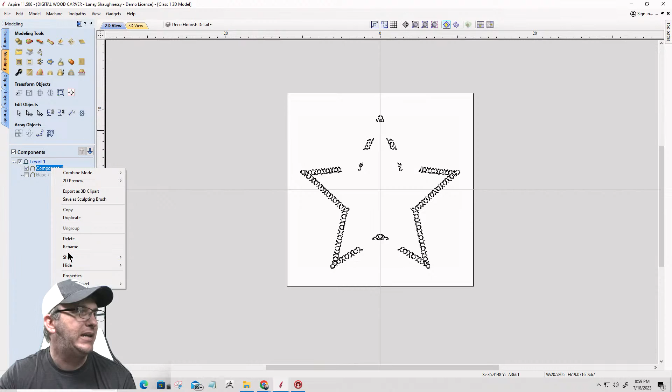All right, cool beans. So now I'm going to delete that component, what I just built, that little flourish and all. I'm going to delete it because I want to build this up from its foundation - I want to build it properly. So that's going to be one of the last vectors that we work with.

So now on the flourishes here, let's make this a color that could easily stand out - we'll go with kind of a bluish purple. And if any of you guys and girls - don't be ashamed, a lot of people do - if you have any color blindness issues where you can't see reds or greens, and if I select a color that you can't see, let me know and I'll change it. I have to do that often. So just don't be ashamed - color blindness is color blindness.

Okay, so now if I turn on my layer 1 design, you can see that new flourish vector. If I turn off the blue flourish vector, my old flourish is still there. I'm going to say you can either keep your original layer intact - the vector as it was imported - as your master, on its own layer, name it master or whatever, so you can have something to refer back to. But we need to create a layer where we can get rid of what's bad and keep what we just created that's good.

Right? We don't need to have a bunch of stuff overlapping. This is all the bad stuff. I can't just have the good overlapping the bad, because that just meant no, we don't want that, right?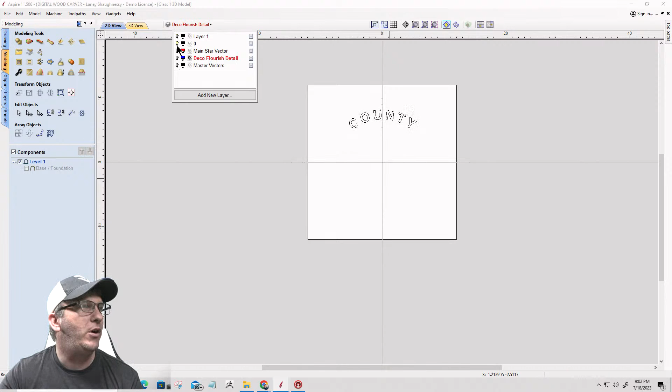All right, so if we come in here and turn off our original and everything, we go to our master vector, it's there, the whole thing, right? As is and all, original, not our cleaned up stuff and everything. It's all right there. Our star, our deco flourish is there. Our star detail is there, right? The word county that we typed is there in that layer 0.

So on this master, I'm going to come over to the layers tab. I'm going to move that to the top of the list up here, and I'm going to lock that layer so it's protected. If I need to refer back to it, if I accidentally deleted something and, oh shoot, where'd that go? I missed it and deleted like 20 steps back, I can always go to my master and fix it. Now that's my master, it's protected. Now back in layer 1, turn that back on.

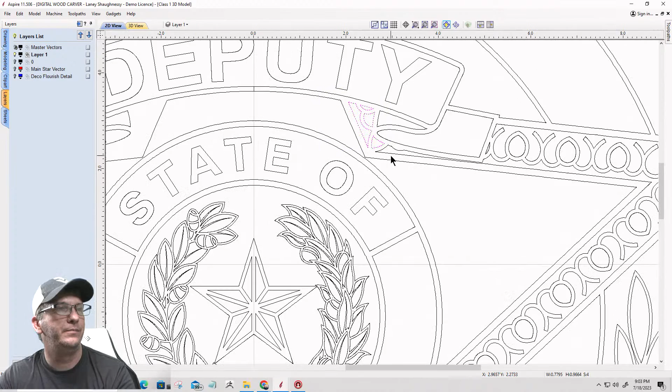I want to delete these vector flourishes, right? All of these vector flourishes. I'm not going to delete this and this because that's my banner, but I am going to delete that, and that - that's part of that banner on both sides. Up here. Now this one, yep, that too. I almost confused myself there for a second. That, over here. Get rid of all that, I just don't need it no more.

Okay, now I can turn on my deco flourish layer, right? And there's my vectors for that. Okay, so that's that, my star vectors. The star vector still needs to be there, but I'm not deleting anything else. I still need these other vectors for building and everything, but my star vector is there. Okay, so that red star vector is the star, and the county's there.

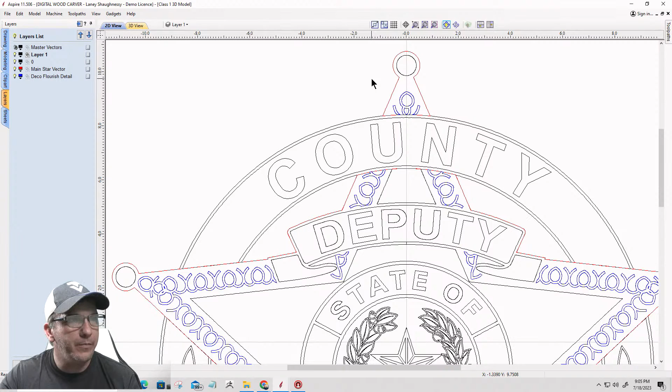All right, so this design has now been completely cleaned up with all of the things that I now have. All except for one vector I'm missing, let me see, am I missing it? Hold on, bear with me a second. No, I have all the vectors. I was about to say I'm missing one, no, I have all the vectors I need now to start building the model.

So now it's 9 o'clock, we started at 7:15. What we will do is, just to get a little bit of modeling in, we're going to go to 9:15, so 10 more minutes, ladies and gentlemen. And that is going to be part 1 of the class, so it'll be 2 hours, 7:15 to 9:15. We're going to go 10 more minutes, and then we're going to be part 2. We'll finish this model off, and create the toolpath, the completion and everything.

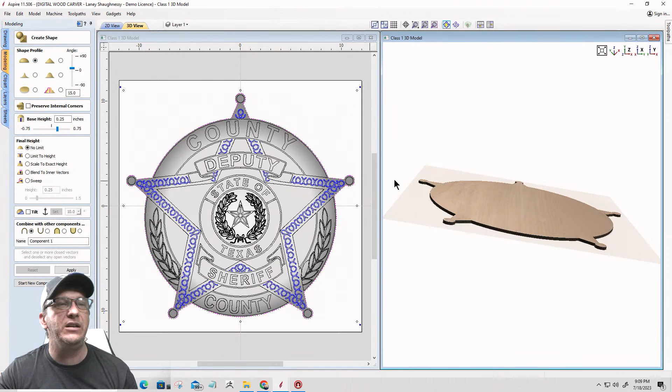To remember from the beginning of the class, we selected the outside most vector, that outside boundary, and created a shape with a curved profile - a 15-degree curved profile with a 1/4 inch base. That's the straight meat underneath. Base is always that straight meat underneath, and your shape height is from the top surface where the shape starts getting formed - from that top edge, that's your shape height. From that top edge down is the base height, all the meat and everything.

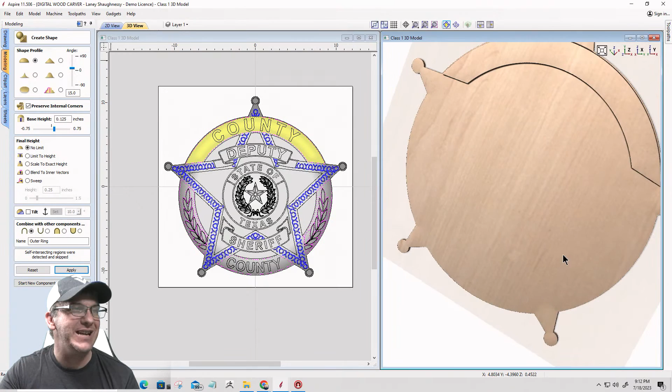That indicates that those vectors are not closed, they're open, and I've got to fix them. This is what I'm talking about - the software will let you know when there's a problem. So I'm going to hit reset to get rid of that shape, and what I'm going to do is go back and select my shapes.

Again, those same 4 ones that kind of represent that circle. I'm going to close out of this modeling tool for a minute. I'm going to go into the join tool, and it shows that I have 4 closed vectors.

Well, it's not letting me build the shape for one reason or another, whether there's not enough meat for the potatoes, or whatever the case would be. For some reason, it's not letting me build the vectors. So I'm going to do one at a time, and I'm going to let the issue bring itself to light. Instead of doing all 4, I'm going to figure out one at a time what's working and what's not working. So let's go back to the model shape tool.

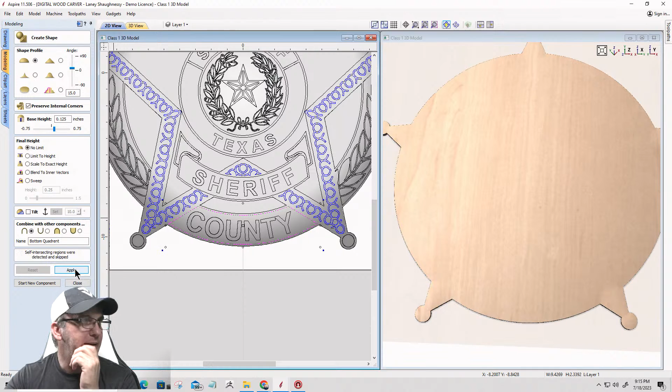That didn't work. So let's go back in and let's figure out why not. Let's turn off preserve internal corners. 15 degrees, no extra numbers or anything in there. Apply.

There it is. So the preserve internal corners was not allowing me to create that shape. Now, because that presented itself, I'm going to assume that was why it wouldn't do it when all of them were selected - process of elimination. Rather than building these components individually and having to put them together later, I'm going to hit reset.

I'm going to go back to having my 4 vectors selected. I'm going to make sure that preserve internal corners is turned off. And I'm going to rename this back to my outer circle. And I'm going to click apply. And there we go. Okay, so that's going to be that.

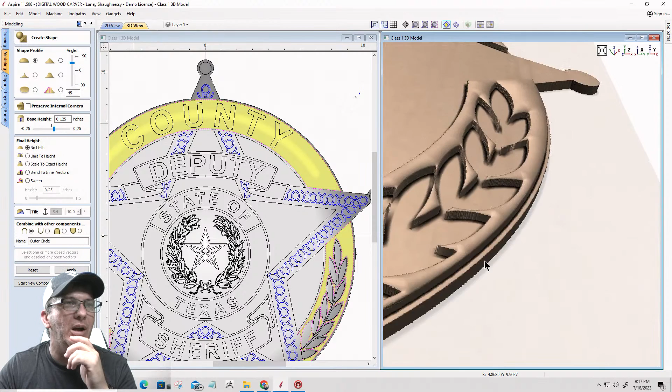Okay, now if you look, I have these pillow tops. I don't need that much pillow or curve, I don't need that much of a dome, if you will. And if I went to 75, of course you can imagine what that would look like, right? It would be extremely pillow-topped, right? So that's what we don't want.

So all I want is a nice subtle curve. For me, this one is going to be 15 degrees. My letters, when I do the words, they'll be 10 degrees and stuff like that. But 15 degrees and apply - just a nice subtle curve. So that's the extreme, okay?

All right, so we went 3 minutes over. So let's build 2 more little components, the 2 leaves here, and then we'll save everything, and we'll be continued tomorrow. All right, so click on the button that says Start New Component.

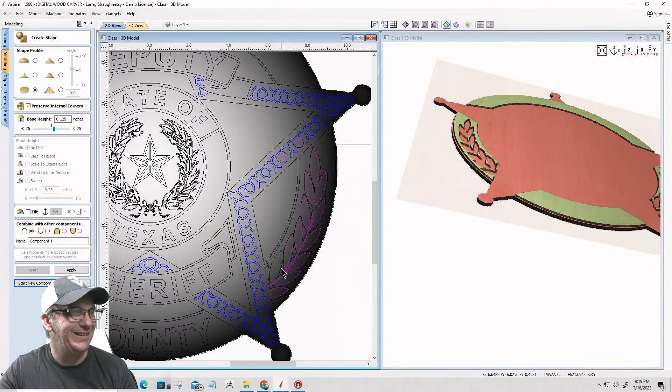Okay, so the next component is going to be the internal leaves. Here, that. Make sure nothing else is selected - like, I accidentally grabbed these circles, that's not part of what we're doing, that's the flourish. But make sure that I got everything selected that I want to be selected.

This one is missing one of these shapes here. I'm going to hit G for group, that way I don't have to reselect them individually, I can just click on them. And this one's missing one of its shapes, so I'm going to hit U for ungroup. I'm going to hold down my shift key, turn that off, and I'm going to hit G for group to group the majority. I'm going to take this, hold down the control key, and drag. Oops.

My mouse is not liking the drag today. I don't know why. All right, let me see if I'm missing. Oh, no. Oh, here's what I'm going to do. I'm an idiot. That's what I'm going to do. Here's what I'm going to do.

I'm going to mirror to the other side from this one. Ungroup, turn this off. Group, so I don't have to reselect all that stuff. This one here, I'm going to mirror, create a mirror copy, flip horizontally to the other side, and put it right back in there. See? That's why I like these symmetrical designs.

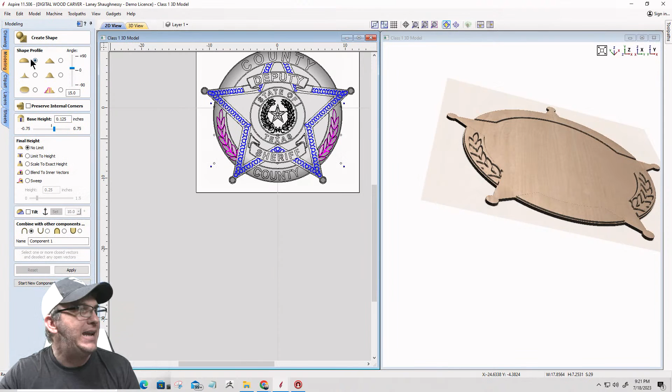Okay, one more time. Let's select my group. I'm going to hit letter U for ungroup. I'm going to hold down the shift key, and I'm going to add in that leaf and this leaf. I'm going to hit G to group that back together so I don't have to deal with it later. And that shape is going to be a curved profile, 15 degrees I'm going to go.

But now, remember, from my foundation, these little banners were 1/8 of an inch tall. I want my leaves to build up taller than that 1/8 of an inch. So I'm going to add some height in here, and for me, I'm going to make it 3/16. So I'm going to give it another 16th, 0.1875, and I'm going to click Apply.

Okay, let it build that. Now, these shapes and everything, that straight wall, this is the last thing that we're doing for the night. That straight wall and stuff, it calls for some rough edges and all. So we're going to add a draft to it.

Now, when we add a draft to this, the model's going to blend in with one another, and it's going to look all funky. So they are going to have to end up merging together, and that's going to require us to do another level. What I mean by that is follow me here. Let's close this tool. This is the last thing, I swear.

We're going to turn off the base foundation and our outer circle, so the only thing that is visible is these little leaf petals, if you will. The reason why we turn everything off is because when we add a draft, it creates a draft on the visible component, the visible component. So I don't want anything visible but the items that I'm drafting.

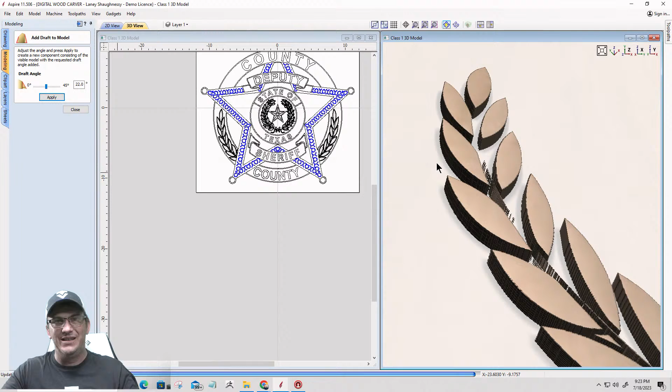So I'm going to create a draft, and for this, I'm going to go pretty extreme. So I'm going to go 22 degrees on the draft, and what that's going to do is it's going to create a 22-degree angle on the sides of the base of these shapes. You see that?

Okay, now when I close this, if you look, it created the model with draft. What it means is it took those leaves and feathers and it recreated that model, that shape, but it put a draft on it. So that means that the original component I can either delete or turn off because I don't need it since it's already modeled into this one with the draft. So I'm not going to delete anything, I'm going to turn it off.

And you can go through to be proper, to keep yourself organized and everything. What you can do is give these components their... don't do that, hold on. Edit, undo, delete. Give these components proper names instead of component 1, component 2, component 3. So these are the original outer wreath, that's what I'm going to call it. Wreath leaves. Okay, now I'm going to turn that off

because it's been redrawn. Now, when I turn on the outer circle here, notice by default, this is the last bit of tidbit: when you do a draft, it recreates the model and it creates it as a merged component instead of an add component or a subtract. It defaults to a merged component when it creates that new shape. Now, when I turn on my original outer circle, that shape and everything, the way that these components combine, imagine, if you will, just bear with me, I'm going to change this combine mode to add.

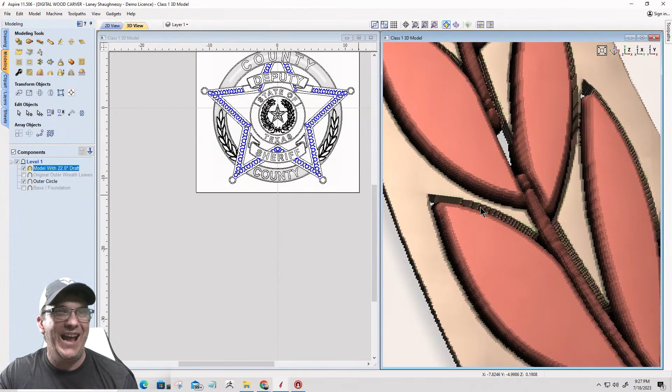So when I change that combine mode to merge, that's all well and good how it merges with the little box that's around it. But imagine if I was telling it to merge with the foundation, and I turn the foundation on, this part gets sunk into the foundation because it's merged. The parts are merged together. So I can't have that.

I need these leaves to sit on top of the foundation to be added to it, but I also need them to be merged with that surrounding banner. So that's why I create a new level, because this component is going to be on this level with that outer circle.

Let me move the outer circle up there. That outer circle is going to be merged with those leaves, but they are interacting with each other independently now. Those two items that are in the same level are acting independently with one another, nothing else. And it's the level, how the level is combined with the level below it, that's important. We need level 2 to be added to level 1.

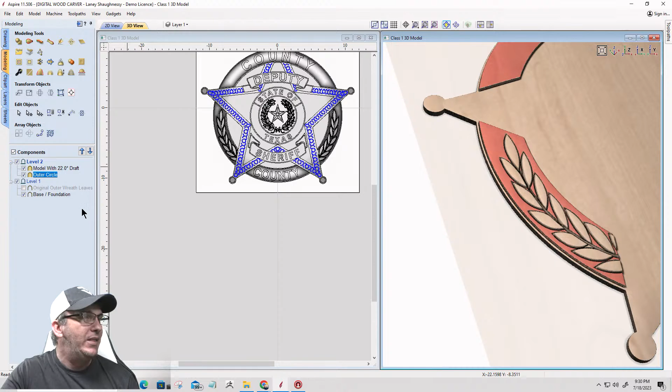So that is where we're leaving off. We're going to hit save. Let's put this into kind of a full view here. Let it save first. All right, all right, all right. So it looks like this coming Tuesday, a week from today, is when we're going to finish off.